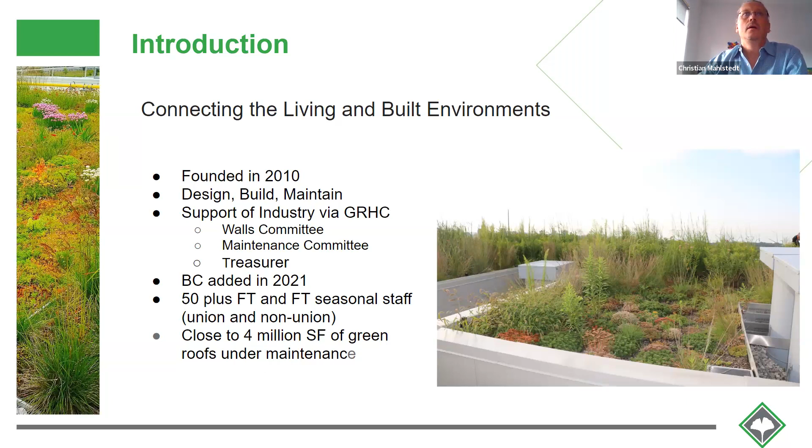Briefly, just to lay a bit of a groundwork, what is a green roof? A green roof is a specialized roofing system that supports vegetation growth on rooftops. Sounds simple. It is relatively simple, actually. Green roofs are often talked about in terms of type: extensive, semi-intensive, and intensive. Basically, the extensive is the simplest type of green roof system you can have, lightest weight, typically lower cost, and is designed primarily to deliver on a reduced set of performance metrics. Stormwater management, contributes to sound dampening, urban heat island, etc., but it doesn't do that as well as more in-depth profiles.

As the weight of the assembly goes up, that's typically due to the depth of the growing medium, that allows you to have a broader palette of plants to work with, increased performance on some metrics, and as well the price goes up. The pricing you see here is basically a somewhat generic price for each category. It's for a relatively simple low to mid-rise project that's plus minus, let's say 500 square meters. If you were to go really small or really complex, that upper bound would be much higher. For example, if you were to do a small residential green roof, you could easily be at the $50 to $100 a square foot range.

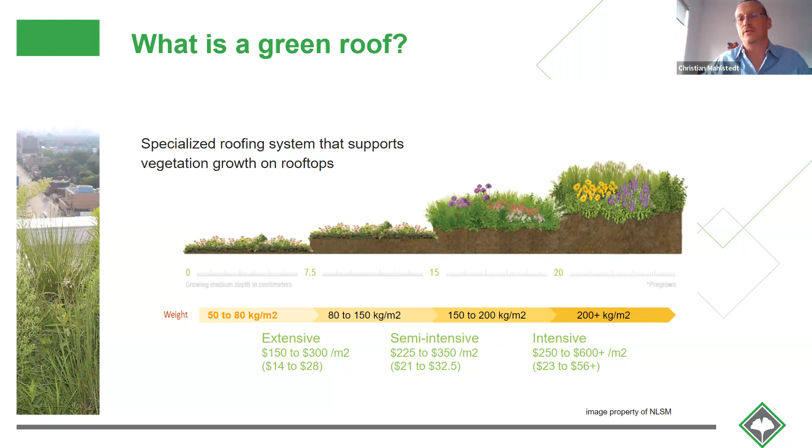Just briefly, so that we're all on the same page, for those of you who are not 100% familiar with green roofs, what are the components of a green roof? Well, first, you start with the non-green roof components. Your structure, that can be a concrete deck, a metal deck, a wood deck. What the waterproofing for that roofing assembly is. The picture here shows a conventional roofing assembly where the insulation is below the membrane. It could also be a protected membrane roof assembly where the insulation is above. The only difference that creates in this image is where the root barrier sits. It always sits on top of the membrane.

And then on top of that, you have some sort of drainage layer built in. That can be a synthetic, plastic-based dimple drain mesh, or a more in-depth cup-based system that retains more water, for example. It could simply be roofing ballast in some types of roof assemblies. And on top of that, you have some sort of filter built into the system to separate the drainage from the media component of the assembly. Your growing medium, as you saw in the slide before, can range from nothing essentially to multiple feet of media. And then the vegetation, which can vary dramatically.

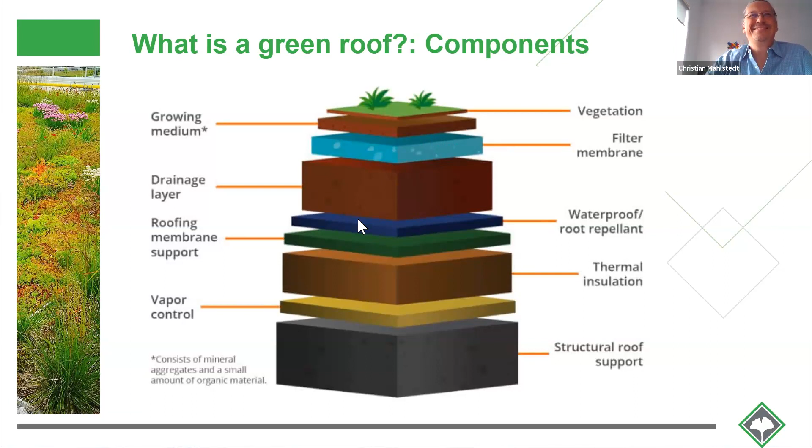You're presuming that I'm going to talk quick enough to give us lots of time. All right.

Benefits. Public versus private. I think what sets green roofs apart is that it's a combination of public and private benefits. If you look at other green infrastructure, green building techniques, such as solar, for example, or passive house construction, those are, from a societal perspective, beneficial, and the returns are primarily, when you're looking at things from a municipal perspective, private benefits. They reduce operating costs or provide benefits primarily to the owner versus to the community that they're in.

Green roofs are unique in the sense that they have an impact on the local community, and they provide those benefits not just to a private owner, but that community. Air quality by reducing particulate matter, biodiversity creation, mitigation of urban heat island effect, stormwater management impacts, increased aesthetics and enhanced spaces, are public as well as private.

On the private side, you add energy savings, life cycle returns by increasing the life of a roof membrane. Your standard commercial membrane is plus minus these days about 15 years. There's obviously a wide range in there. There can be roofs that have 25, 30-year lifespans, but by the addition of a green roof, the European experience is showing us you can have triple plus lifespan. So we could be talking about a roof that's roofed once in your lifetime, effectively.

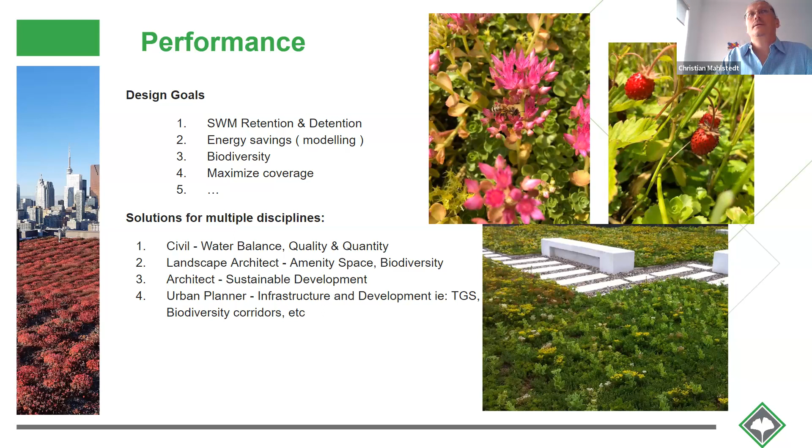It does. Thanks, Christian. You're welcome.

I want to take a look at the main focus of green roofs, which is stormwater retention and detention. And it also illustrates a little bit public versus private. Retention is a blunt tool in some respects. Civil engineers can't use it to implement detention on a project. So retention is really the tool that's driven policy globally, and basically is minimizing the annual runoff off of a site, or your water balance.

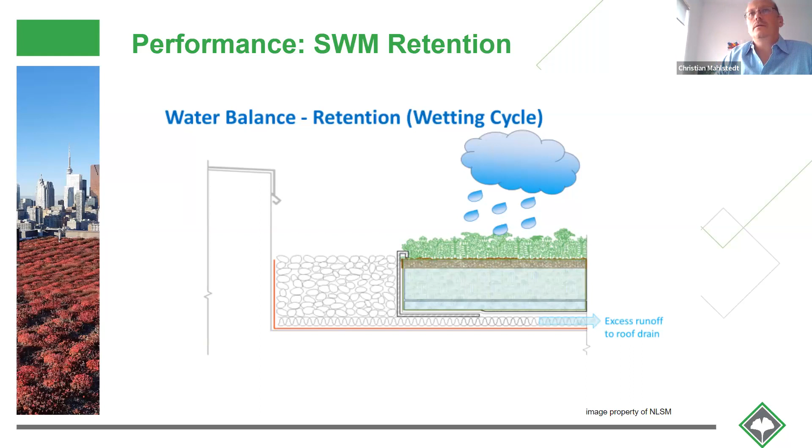A green roof will hold water until it reaches saturation, at which point it runs off. Retention would be the water that basically evaporates or evapotranspirates off a roof surface and doesn't enter the system. I believe in the city of Toronto, they allow you to extrapolate 5 millimeters for a core green roof assembly in your water balance calculations. And in the Toronto Green Standard, certain green roof assemblies and different vegetation types allow you to extrapolate 7 or even 10 millimeters.

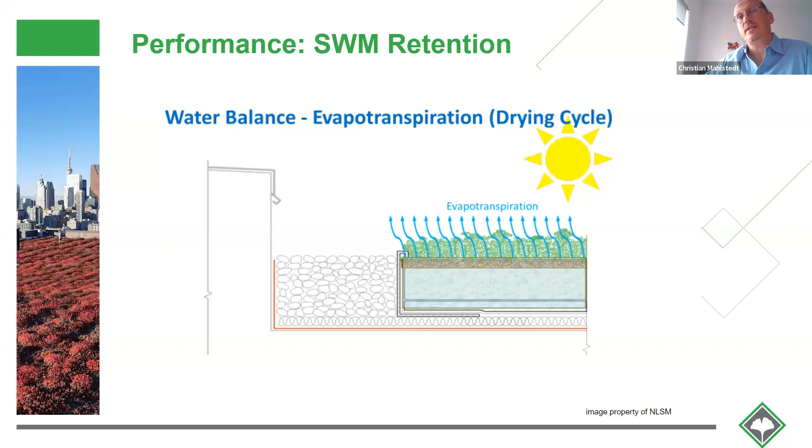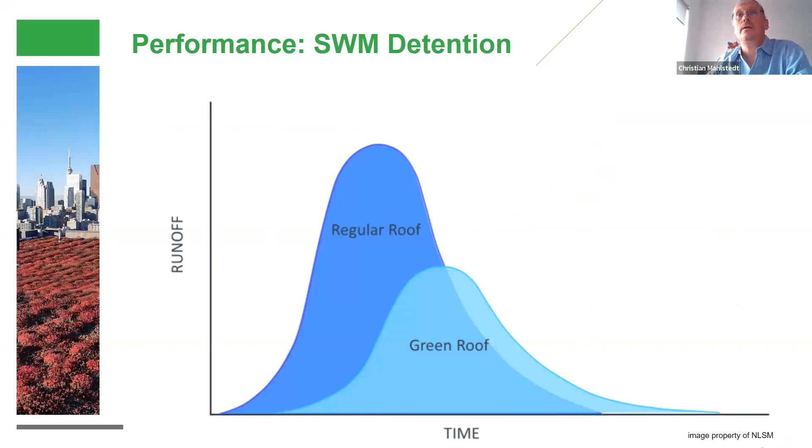Detention. Here, with retention, you can see the light blue curve is the volume underneath it. The retention is the component by which the area of the curve has shrunk, or water balance. And detention is the peak flow delay and the peak flow reduction off of a roof. And now via blue-green roofs or passive friction-based green roofs, you can do engineering calculations to provide a quantifiable runoff rate off a roof, take water out of a cistern or other stormwater solutions, and use a green roof as a detention tool.

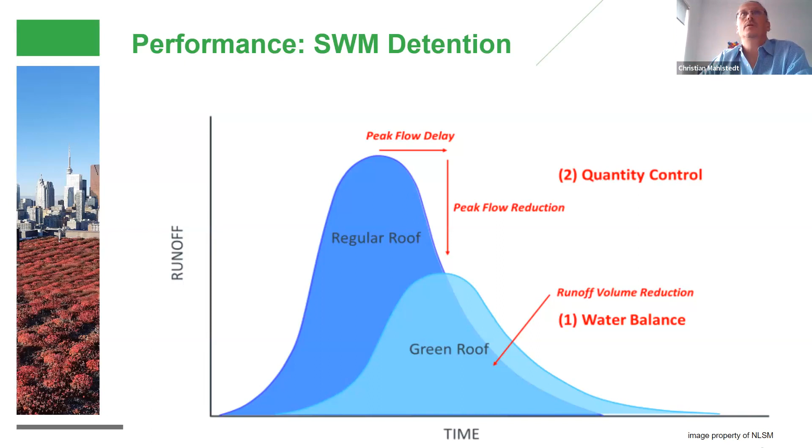This project is a small pilot project that a municipality did. They had done the solar, and then they wanted to do a green roof and incorporated the two. So we had to dismantle the solar panels and reinstall the brackets for them.

I think the challenge is, green roofs increase the performance of solar, but in the broader framework of our regulatory environment, Ontario in this case, solar has a high private return on investment, and adding a green roof to that in and of itself reduces that ROI. So people just don't do it unless they have other reasons for doing it.

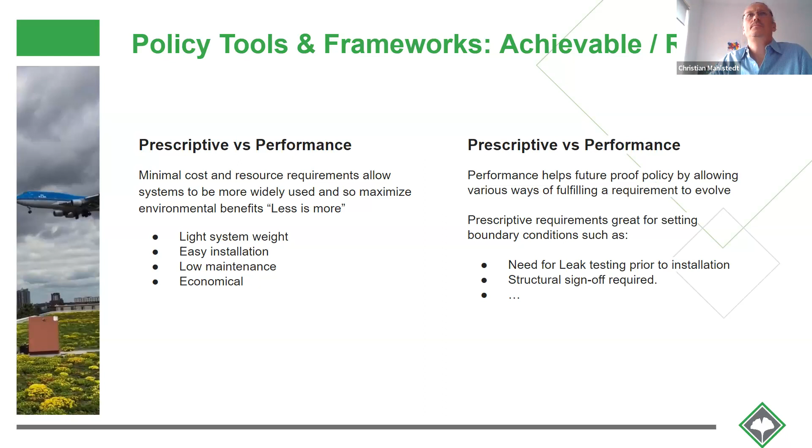All right. Options and tools for policy implementation. If you look at green roof policy across North America, there are a number of different ways, and they're all somewhat different. Green area ratio is one example of providing weightings to different types of green infrastructure and having you need percentage X green area, and then by applying different weights to different elements, a developer is free to meet the targets set in the manner that makes the most sense for that site. It's an approach that Washington, D.C. has chosen, for example.

Construction standards. The Toronto Green Roof Bylaw is a great example of that. It has a construction guide. This is how you do green roofs, with guidelines explaining how it's done. There's also guidelines to achieve biodiversity.

And then leaving green roofs aside a little, or taking a bigger picture approach, the Toronto Green Standard is another method for illustrating and basically incorporating multiple green development standards or green infrastructure wishes into one document that will allow you to target different areas for a project, and providing options for meeting requirements.